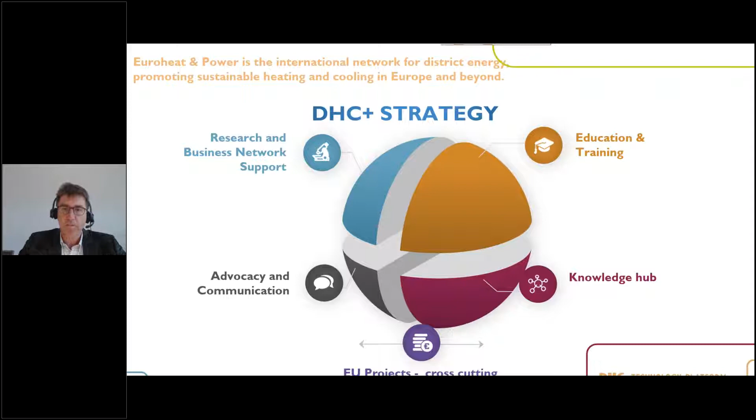Next, I want to briefly give you an overview of the process of evaluation and selection of the awarded best papers.

In total, we received 11 applications from 10 countries. These papers, around 8 to 10 pages in size, were evaluated according to scientific importance, the methodology used, creativity, and, which is important for us, the expected market impact.

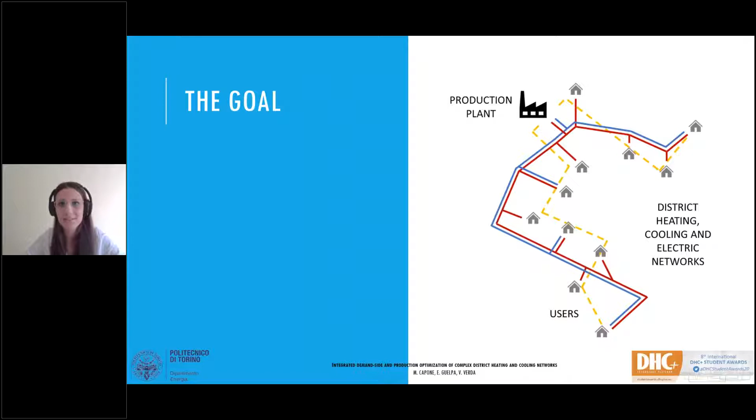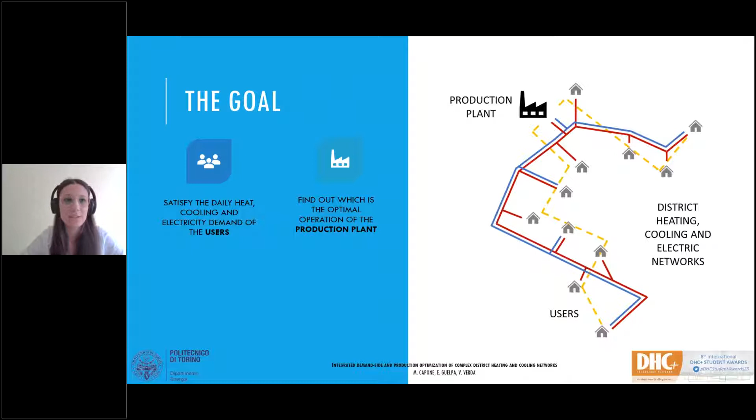So on the whole, we have 3 main interconnected players in our system: these are the users, the networks, and the production plant. And our goal would be to satisfy the daily heat, cooling, and electricity demand of the users by finding the best configuration of the system, which allows us to minimize the predefined objective function, that in our case will be the total daily cost. And this will be done by means of a global optimization tool, which takes into account all the main elements of the system.

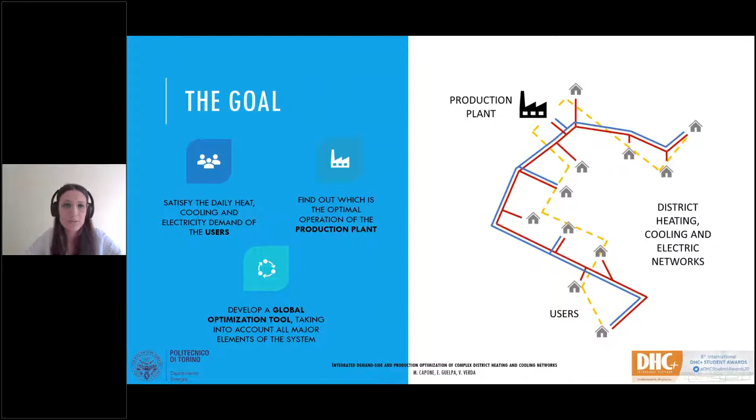For what concerns the production plant, it is made by multiple components. Here you can see that we have a heat-only boiler, a cogeneration plant, a photovoltaic system, an electric heat pump that can produce both heat and cold, an absorption refrigeration unit, and 3 storages. And the external resources that drive the whole system are natural gas and electricity purchased from the grid. These are the only resources coming from the external system, so they will be the only terms that are associated with cost and will appear in our objective function. Generally speaking, they are the fluxes that we want to minimize.

As you can see from the scheme, we have also inserted the possibility to sell electricity to the grid if our production exceeds the request. So on the whole, we want to buy the least possible from the external system to satisfy the heating load, the cooling load, and the electricity load.

But while the cooling load and the electricity load are constant, the heating load is flexible. This means that we can also act on the customer side to optimize our system. And this is what is generally called demand side management, and it's extremely useful to solve some problems, like, for example, the problem of the morning thermal peak, which poses some limits on the full exploitation of high efficiency plants like the cogenerator, and which therefore increases the cost.

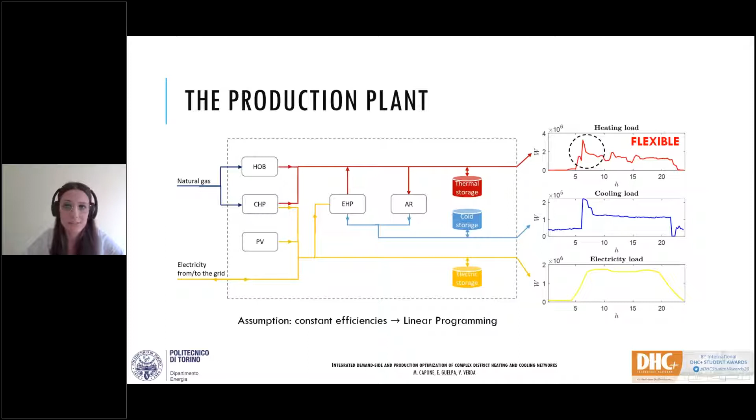But let's see more in detail how demand side management works. So basically we have our system, and what we want to do is to assume that the buildings have a certain flexibility on their thermal request, and to modify their request in order to modify the heat load at the production plant, and in particular to reduce the peak.

But in our case, we suppose that just anticipations up to 30 minutes are possible, and that the energy absorbed by each building during the day is constant, and this is to avoid affecting the user's thermal comfort. So we want to find the best anticipation of the building that allows us to minimize the peak request.

But in order to relate the building request to the heat load of the thermal plant in a proper way, we need to use a model in order to take into account all the relevant thermal dynamics that occur in the system, especially when anticipations are applied.

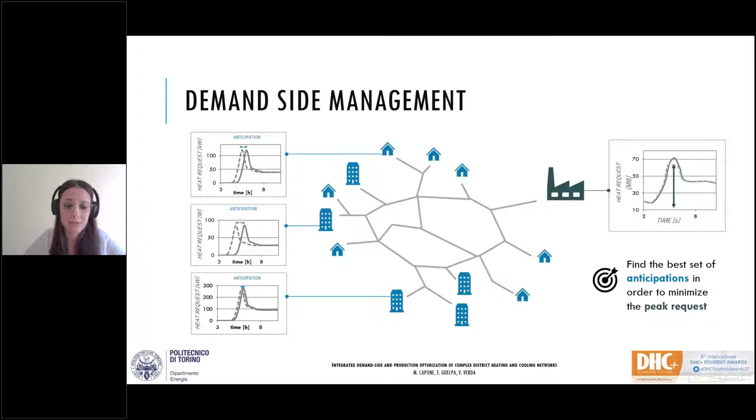And so the district heating network model that we use is a physical model. It is based on the conservation equations of mass, momentum, and energy. And it uses a pseudodynamic approach, which means that the fluid dynamic problem is treated as a steady state, while the thermal problem is simulated dynamically.

We use graph theory to describe the complex structure of the network and the network topology. This means that each pipe is treated as a branch, and each inlet or outlet section as a node. And finally, the model is applied to both the supply and return lines of the network, so that all the dynamics are properly described.

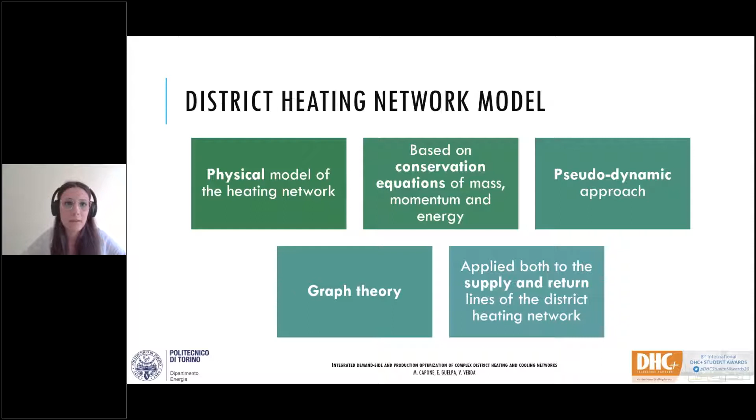So on the whole, the optimization tool that we propose is composed of three parts. The first part is the demand side management of district heating users, which aims at finding the best set of anticipations of the buildings. And this is done by means of a genetic algorithm.

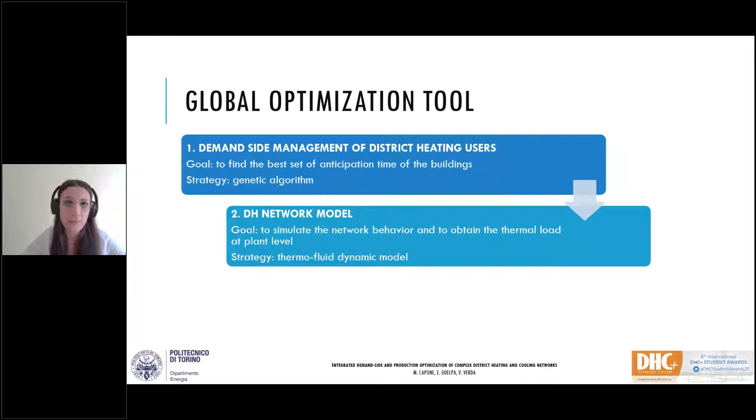This genetic algorithm needs to solve at each iteration the district heating network model in order to find, given the set of anticipation, the heat load at the production plant. This is done by means of the thermofluid dynamics model that we have described. And finally, the genetic algorithm also needs to solve the production optimization, whose goal is to determine, given the set of production units, which ones must be switched on and when, in order to minimize the total daily cost. Thanks to the assumption of constant efficiency of the components, this can be done by means of a linear programming algorithm.

This is on the whole the novelty of our approach, which combines together the demand side management of district heating users, the network model, and the production optimization in a unique, comprehensive approach that, we believe, will bring more powerful results with respect to a sequential approach in which you consider all these parts as separated.

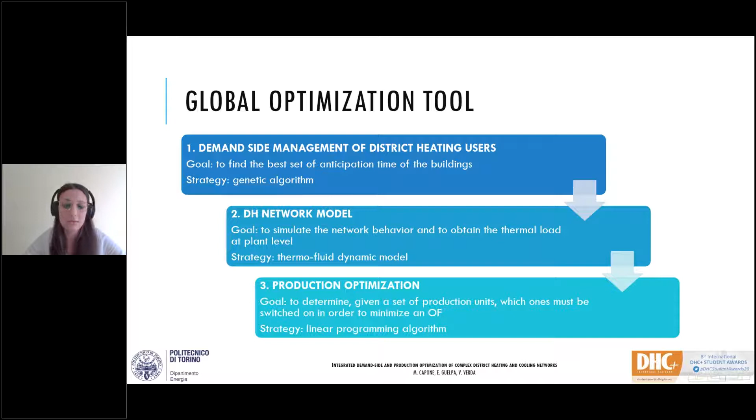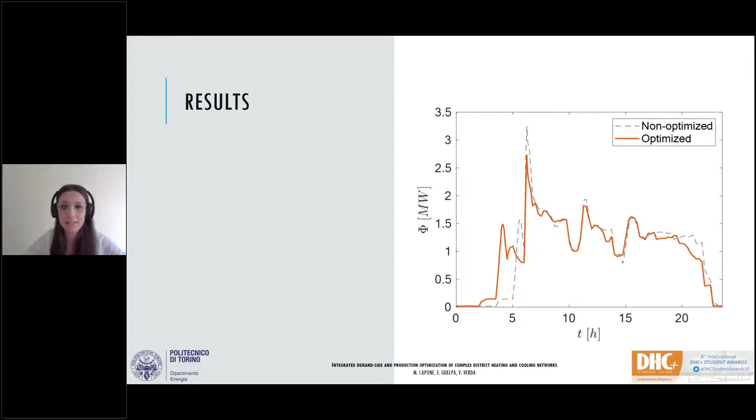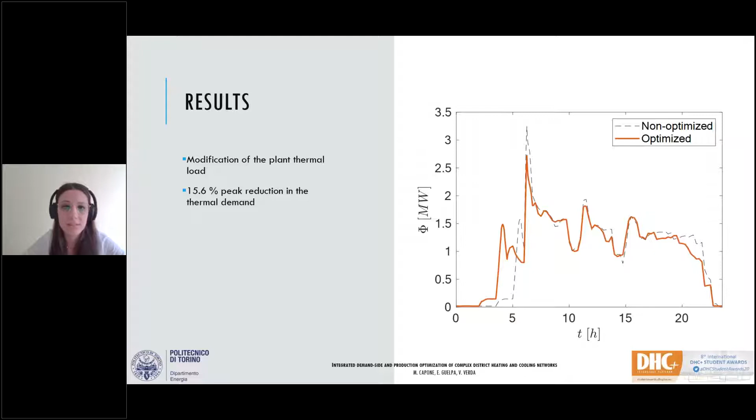But let's see the results. Here we can see the evolution of the heat load at the production plant, and in particular the dashed line is the non-optimized one, so the one without demand side management, while the red line is the optimized one, obtained with optimized set of anticipation. So we see a modification of the plant thermal load, which brings a reduction in the thermal peak that in this case is above 15%.

Here we have the result of the production optimization, and we can see in particular how heat, cold, and electricity are produced in the first row and consumed in the second row. For the heat, we can see that the heat consumption is mainly due to the thermal load, which is the one that we obtained with the demand side management, the one that we saw in the previous slide. Then some other heat is absorbed by the absorption refrigeration unit to produce cold, and finally by the storage.

Storage consumption means that the storage is charging, while storage production means that the storage is discharging. Then the heat is produced by the cogenerator and by the heat-only boiler, while the heat pump is just used a few times. The cold is almost totally produced by the absorption refrigeration unit, even if the storage is used to shift the production when it is more convenient, that means when heat consumption is more convenient.

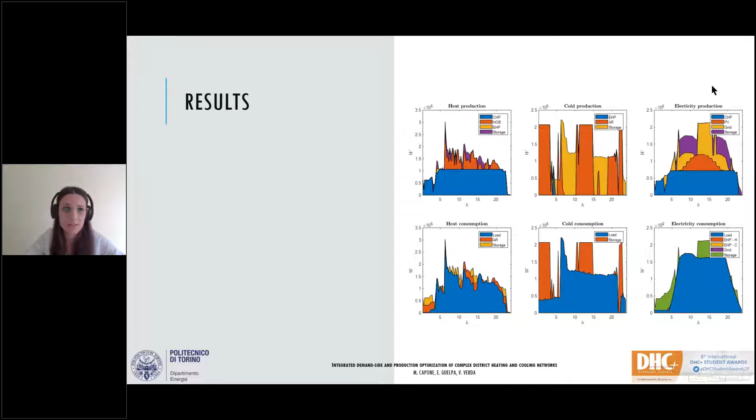And finally, the electricity is produced by the cogenerator and the photovoltaic when available, while the remaining part is purchased from the grid, and the storage is used to buy from the grid when it is more convenient, so where the electricity price is lower. So we see a smart management of the production unit, which brings a significant cost reduction.

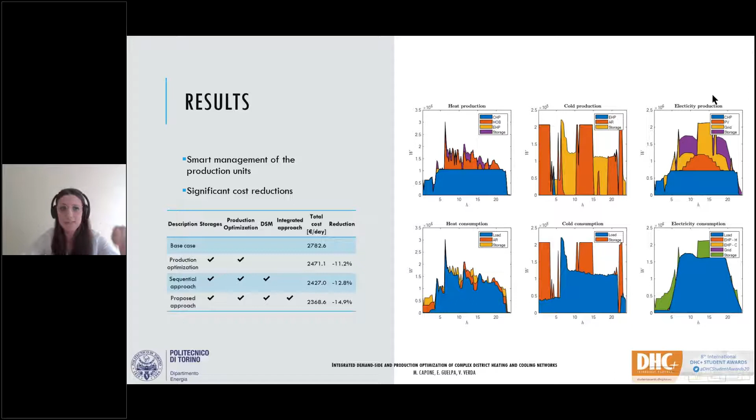These reductions are summarized in this table, and we have a 15% reduction with respect to the base case, which is the one without storage, without production optimization, and without demand-side management. But meaningful results are also obtained with respect to the sole production optimization and the sequential approach, which is the one in which you first reduce the peak and then in a second moment optimize the production.

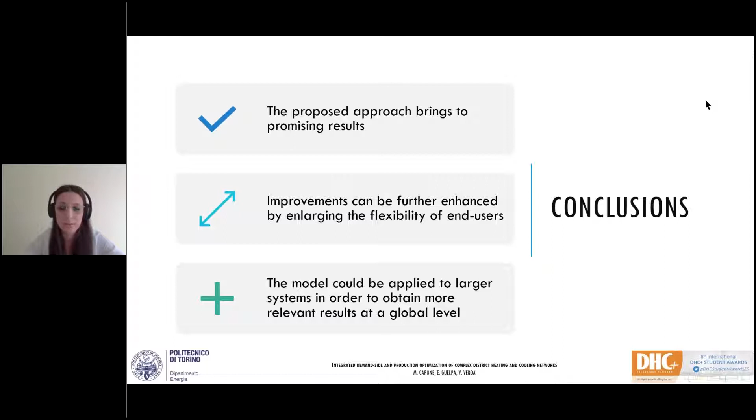In conclusion, we have obtained a tool which brings promising results. These results can be further enhanced by enlarging the flexibility of the end users, that is to say, for example, if anticipations greater than 30 minutes are possible, and they can be further enhanced if larger systems are considered. This work also opened up several research opportunities for future work.

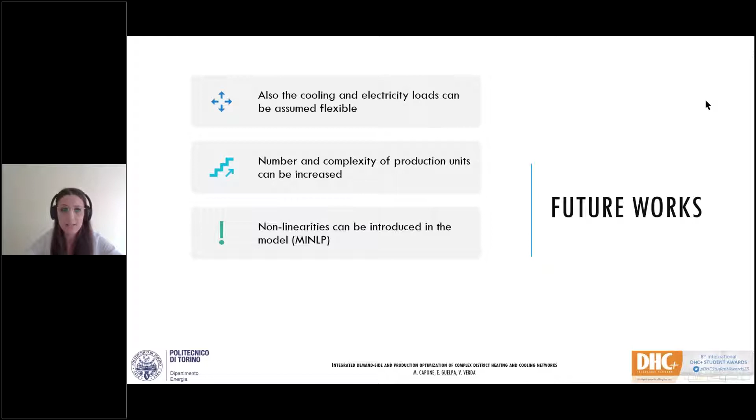First of all, the cooling and electricity loads can also be assumed flexible, but this will require including also the models for the cooling network and the electricity network in the optimization tool. Also, another point is to increase the number and complexity of production units. Then we also need to study the effect of the introduction of nonlinearities in the model, like the nonlinearities that are due to, for example, nonlinear efficiencies of the plant.

And finally, in our work, we have considered all the production units concentrated in a unique point, when in real cases they can be distributed everywhere along the network. So also this point should be taken into account.

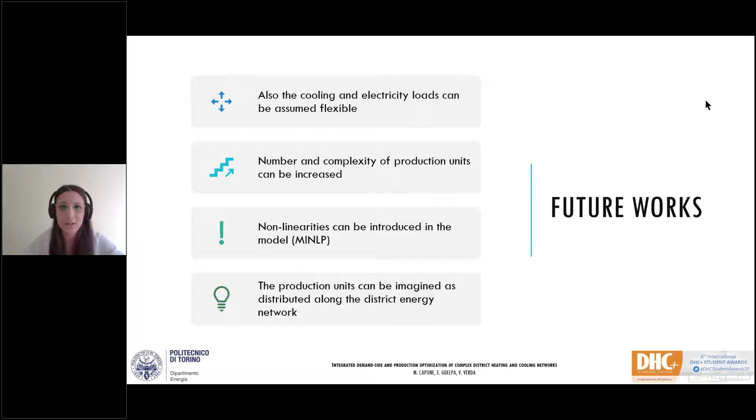Well, that's it. Thank you for listening. And in a while, I will be happy to answer your questions.

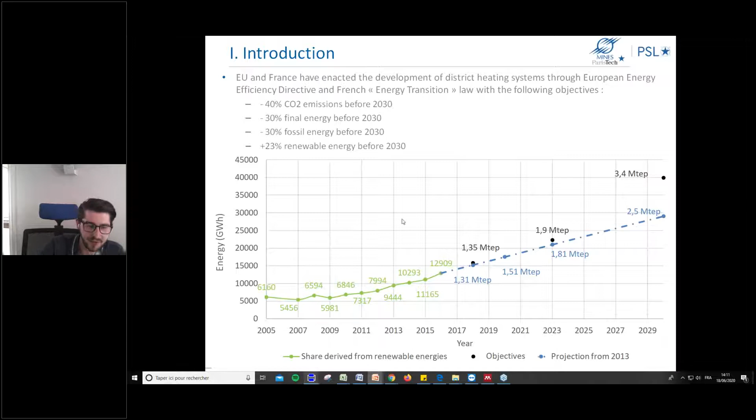Here in the graph, you can see the current situation in France. In green is the energy share derived from renewable energy in district heating systems. In black, the objectives from the law, and in blue, the projection from 2013. You can see that the target will not be reached in 2030. So there is a need to develop the district heating system in France and also to improve the existing one.

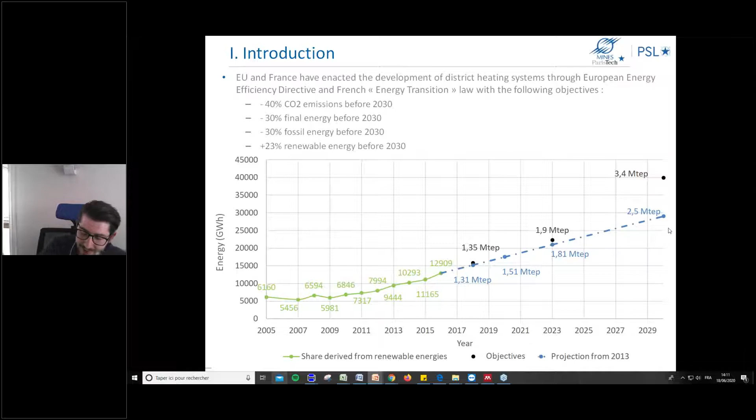And we focus on the second point. So I wondered how to improve district heating network performance. The answer is quite simple: by decreasing the return temperature. But it's easy to say, not so easy to do.

For example, we can decrease the return temperature by correcting malfunctions. Indeed, malfunctions on district heating systems are very common. For example, according to a study on 2 Swedish district heating networks, only 26% of the substations work correctly. So there is a need to work on these malfunctions.

Moreover, due to the complexity of the system, the origins of malfunction are numerous, but the most usual ones have been detected: damaged or manually adjusted valves, poor substation control, and unsuitable secondary systems.

So in the literature, some performance indicators have been developed. We could mention Zinko in 2005 and Gadd/Werner in 2014. These indicators are able to detect if there is a malfunction, but they are not able to detect the origin of the malfunction. And in the real world, operators don't have the time to look for the origin of a malfunction, nor do they have the tools to detect and correct malfunctions.

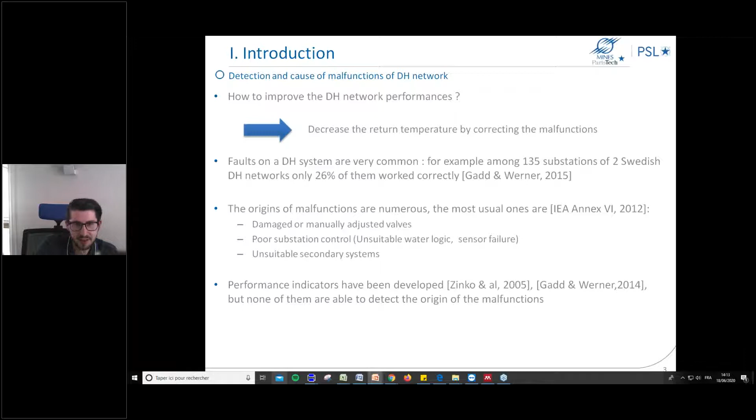So my work focuses on this point. My objective was firstly to develop a district heating model including the secondary side, because there is a lot of interaction between the primary side and secondary side, and many malfunctions occur on the secondary side as well. Secondly, it was to assess the impact of usual malfunctions to create performance indicators able to distinguish each of them.

So the methodology is the following: firstly, we study the impact of malfunction on our numerical test bench. After that, we create performance indicators, then we test them on the numerical test bench, and at the end, we validate the indicators on in-situ data.

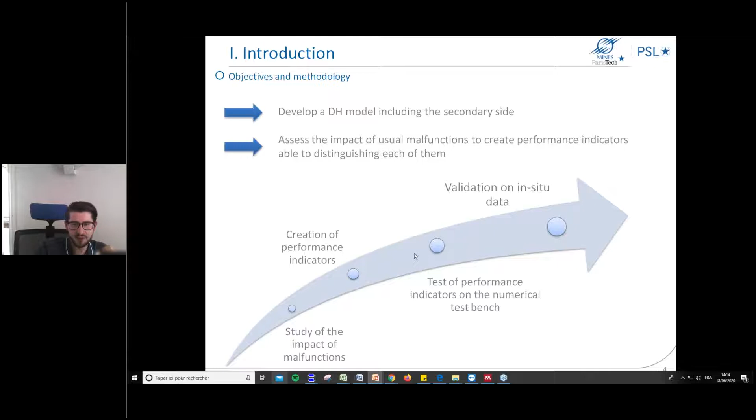Today I will only present 2 specific objectives: the detection of blocked valves and the detection of fouled heat exchangers. When I talk about valves, I mean the control valves on the primary side of the substation. These valves control the flow rates passing through the heat exchanger.

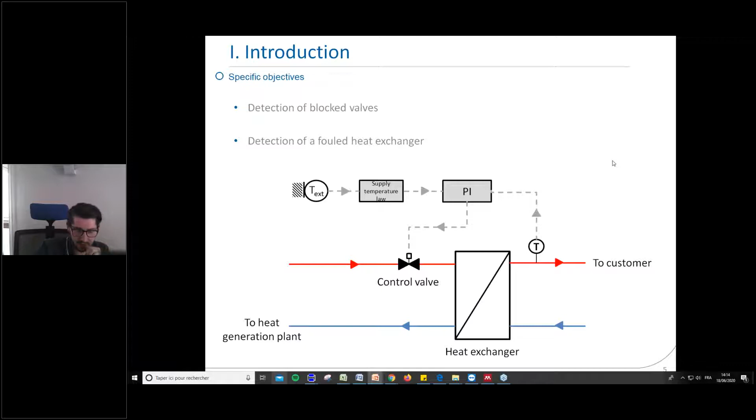So first I will give a brief description of my model. This model has been developed through Modelica Dymola, so it's a physical model. Firstly, you have the production model, composed of a geothermal heat exchanger and a gas boiler, controlled through a supply temperature law. After that, you have the primary network and the pump, and the pump is controlled through a pressure law.

And after that, you have a model of a substation and its control system, the secondary network and its control system also, and a buildings model.

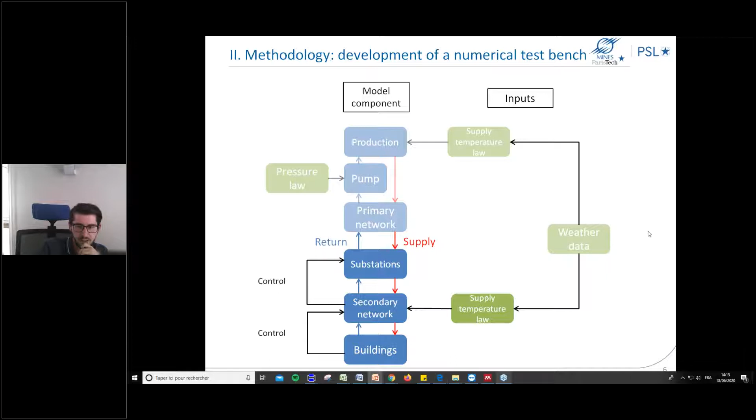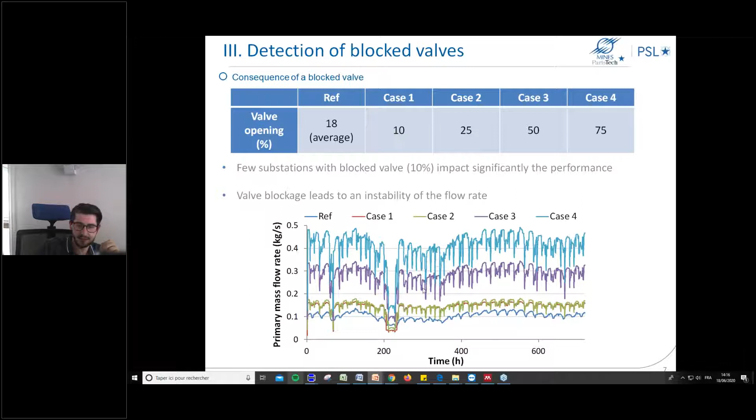And in all the cases where there is a blocked valve, you can see a lot of instability. So in order to quantify the instability, we decided to do it through the relative mass flow rate variation. We compare the mass flow rate at 2 consecutive time steps, with a time step of about 1 hour. And to evaluate the frequencies of this variation and the difference between all the cases, we decided to do a frequency signal analysis, or Fourier analysis.

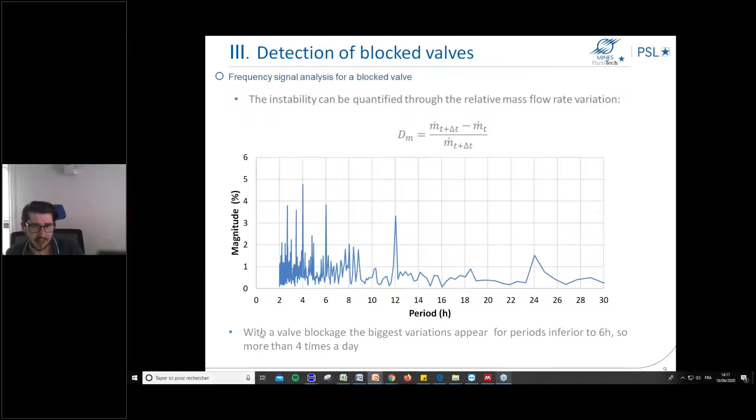And after, we do the same analysis on a substation with a blocked valve. As you can see here on the Fourier analysis, the magnitude of the peaks is higher, and the biggest variation appears for periods inferior to 6 hours, so more than 4 times a day.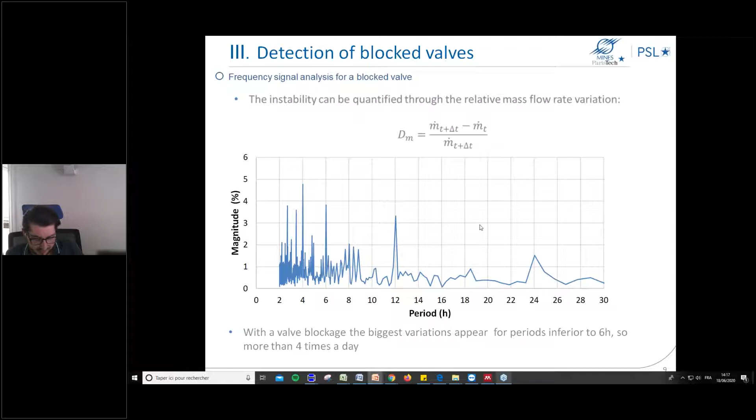Nevertheless, this analysis is overly complex to be used in the field by the operators. So we decided to develop an indicator easy to calculate. This indicator consists in counting the number of times per day when the relative mass flow rate variation is superior to 15%. If the relative mass flow rate variation is superior to 15% more than 4 times a day, there is a regulation issue, so a blocked valve.

Here you can see the results from the numerical test. For the reference case in blue, the threshold is never exceeded, but it does frequently for case number 3, which corresponds to a valve blocked at 50% opening. You can see the times where the threshold is exceeded marked here. The time scale here is about 2 days, and you can see that the threshold is exceeded more than 4 times a day, so there is a regulation issue.

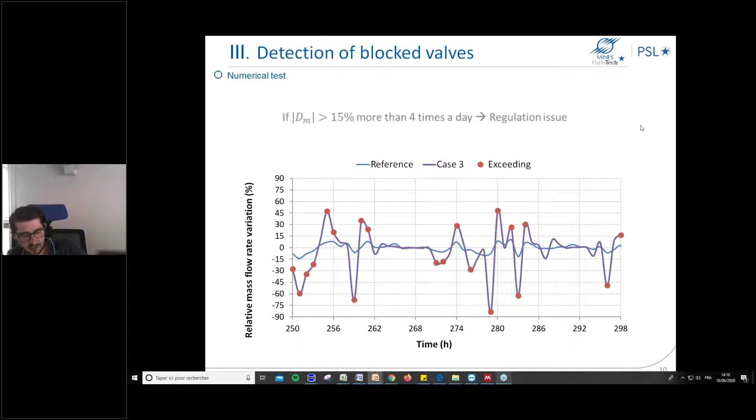So in order to validate this indicator, we tested it on in-situ data. Here, the result demonstrates that there is no control issue for substation X. The time scale here is about 1 week. You can see in red the times where the threshold is exceeded, and you can see that there is practically no exceeding.

But for substation Y, you can see that the threshold is exceeded more than 4 times a day, a lot of the time. So we can consider that in this substation there is a regulation issue, and this analysis was validated by the operator of the district heating system. So the indicator is working.

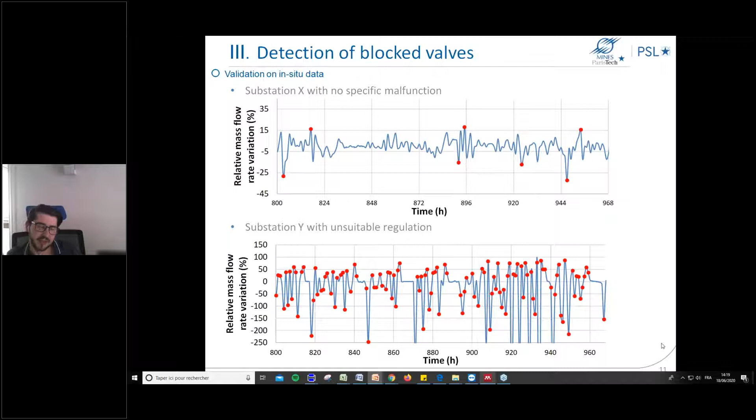Next, the second point was the detection of fouled heat exchangers. With no surprise, the fouling impacts the performance of the district heating system, but the fouled heat exchanger also leads to an increase of the heat exchanger's thermal resistance. In classical substations in France and in Europe, the heat exchangers used are plate heat exchangers in counterflow.

For this type of heat exchanger, the thermal resistance without fouling depends only on mass flow rates, as you can see in this equation. The thermal resistance also depends on a constant named gamma here, which depends only on the dimensions of the heat exchanger and the characteristics of the fluid. During operation of the district heating system, the total thermal resistance of the heat exchanger is the thermal resistance without fouling plus a fouling resistance called RF here.

After an analysis of our data and simulation, we consider that the fouling downgrades significantly the return temperature, about 5 degrees, when the ratio between the total resistance and the resistance without fouling is above 1.4.

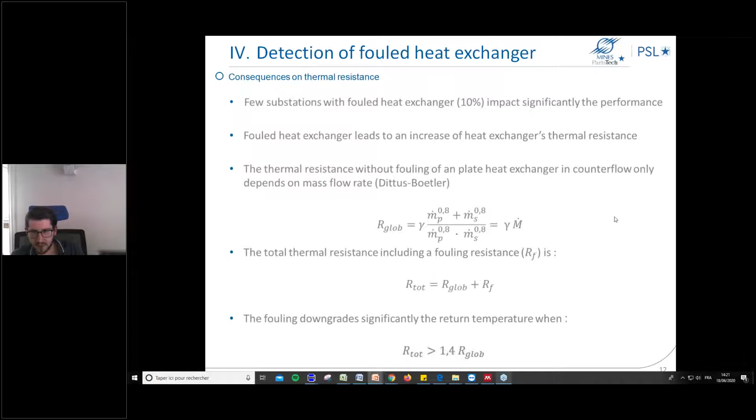So we get this type of indicator. We plot the thermal resistance corrected from a mass flow rate ratio, corresponding to the last equation. As expected, for the reference case, so without fouling, the evolution of thermal resistance corrected from mass flow rates is linear, so it's good news.

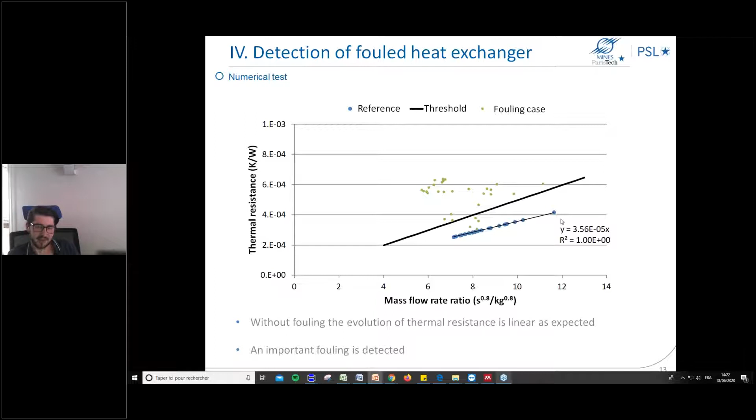Here, we plot the calculated results, and the green points show the case where there is fouling, a very dynamic and fast fouling, and you can see here that the threshold is exceeded, so an important fouling is detected. The numerical tests show that the indicator works, but as before, we decided to test it on in-situ data.

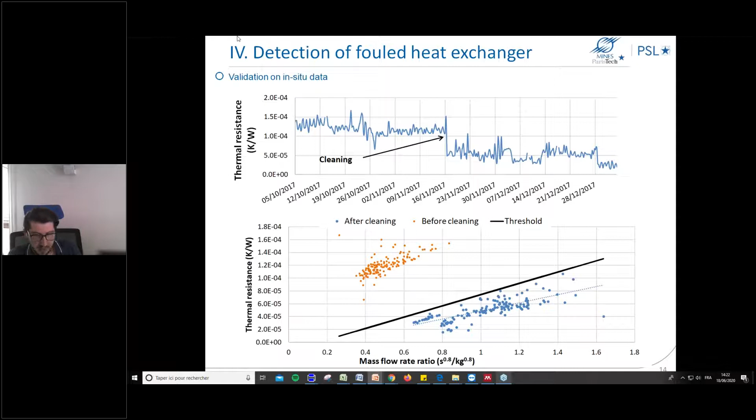So we looked at a substation, another substation. Here you can see the evolution of thermal resistance in time. Around the 15th of November, the heat exchanger was cleaned during maintenance operation, and you can see a meaningful drop of the thermal resistance.

So here, to test the indicator, in blue you have the evolution of thermal resistance after the cleaning. You can see we are under the threshold, but before the cleaning, when the fouling was very high, the points are beyond this threshold. So this indicator was able to detect an important fouling here.

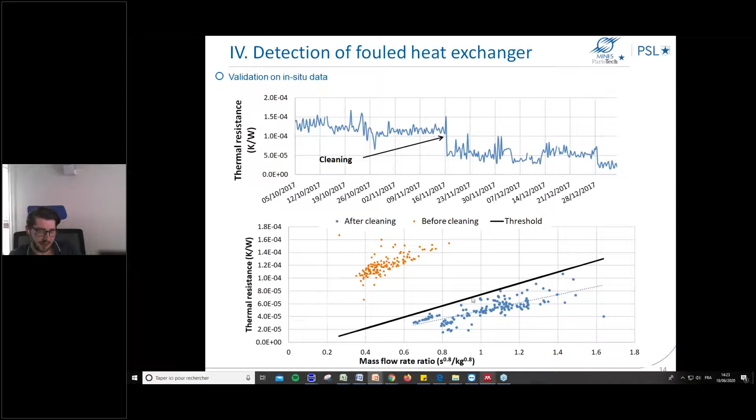To conclude, in my study I have developed a district heating system model, including the operation of the secondary side, all the control, etc. Two possible malfunctions have been tested: blocked valve and fouled heat exchanger. Two specific indicators have been developed and validated: the instability of mass flow rates at the primary side, and also the increase of thermal resistance corrected from mass flow rates.

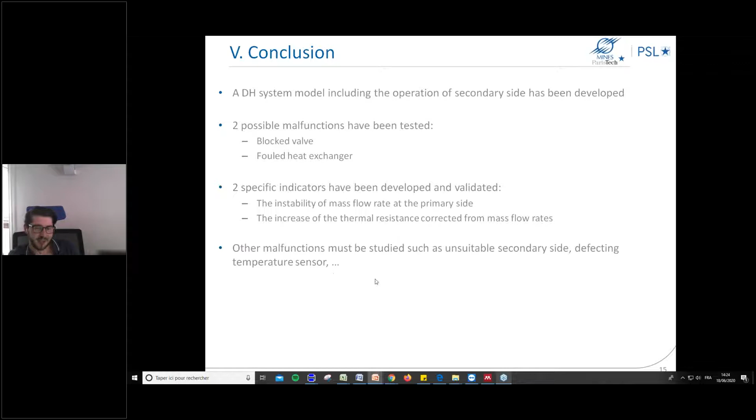In the following works, I will study other malfunctions, such as unsuitable secondary side control or defective temperature sensors, etc. There are a lot of different malfunctions possible, so there is a lot of work to do. Thank you for your attention. I'm waiting for your questions after all the presentations.

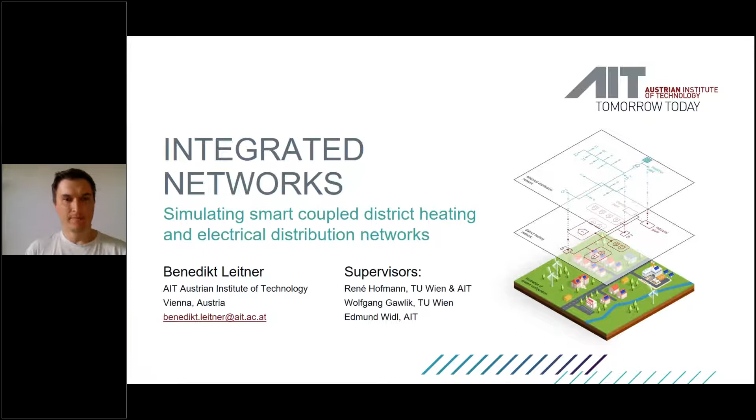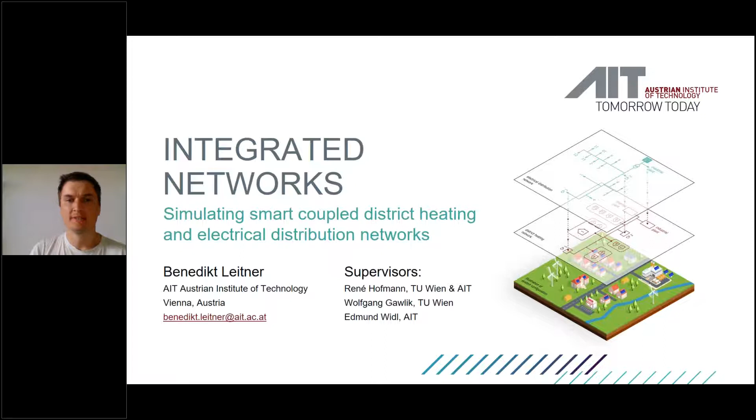I will talk about integrated or sector-coupled networks with a focus on district energy and electrical distribution networks. The motivation is that both heat and power networks are rapidly transforming from centralized, often fossil fuel-based generation to distributed generation storages, integration of prosumers, widespread use of intelligent control, low energy buildings, and increased integration between the sectors. This complexity of multi-domain systems often requires detailed assessment of how these multi-energy use cases affect the system, and we also need means to test smart control algorithms before they roll out in the field.

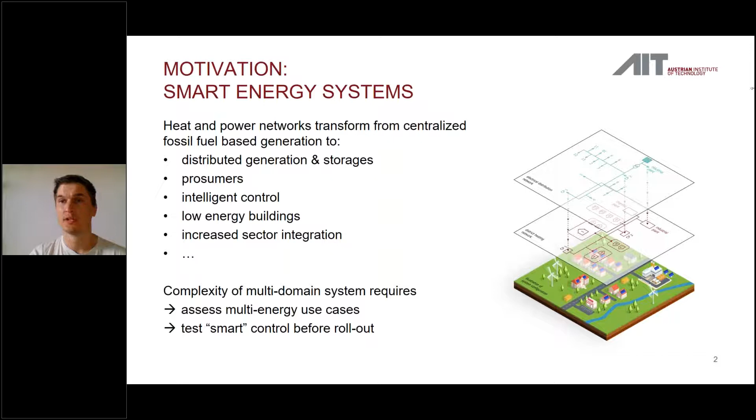When I started my PhD, no real method to assess electric distribution networks and district heating networks together with advanced control systems existed for timescales of several seconds to hours, days, or even years. So this was basically the motivation for me to try to develop some method that allows me to study such coupled systems.

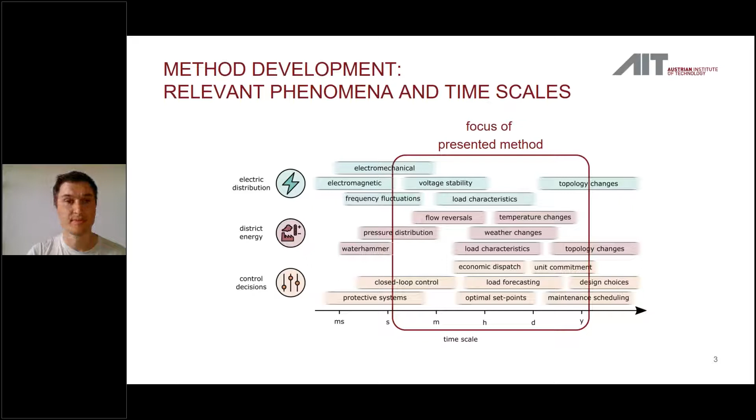I quickly realized that no single tool covers all necessary domains, which are thermal hydraulic models, models for the electric network, but also models for advanced control, like model predictive control, for example. You can now use co-simulation, which is a really nice solution to this problem because it allows you to cherry pick tools that are specifically targeting each of these domains, and couple those tools and models.

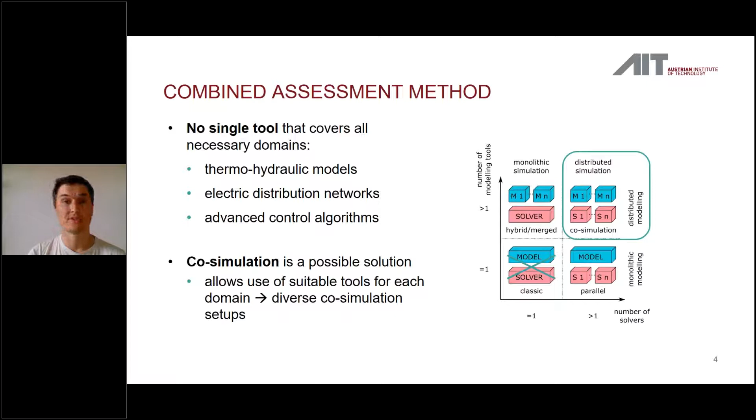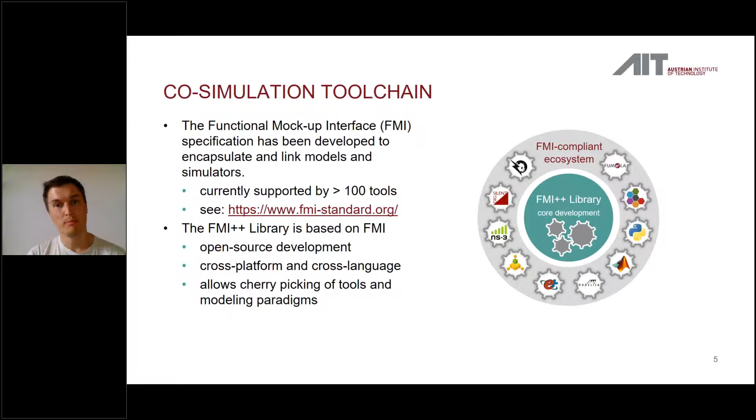For my work, I rely on the functional mockup interface specification, which is basically a standard to link models and simulators. At the moment, more than 100 tools are already supported for the FMI standard. And at AIT, we also developed interfaces for additional tools like Python, PowerFactory, pandapower, etc.

So when I started with developing the method, I wanted to have a model for the physical system, basically representing the electric distribution network and also the district heating network explicitly, and couple those physical system models with different control system models that might be rule-based, optimal control, supervisory, central or distributed controllers, or any mix between those.

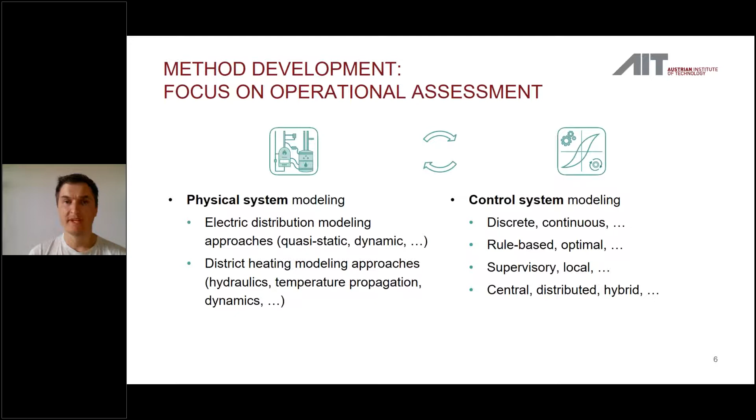The method I came up with uses a dynamic model for the district heating network using Modelica. I developed an open source Modelica library for district heating networks, based on the open source IBPSA library. This model relies on transient thermal models and a quasi-static hydraulic approach for the hydraulic problem.

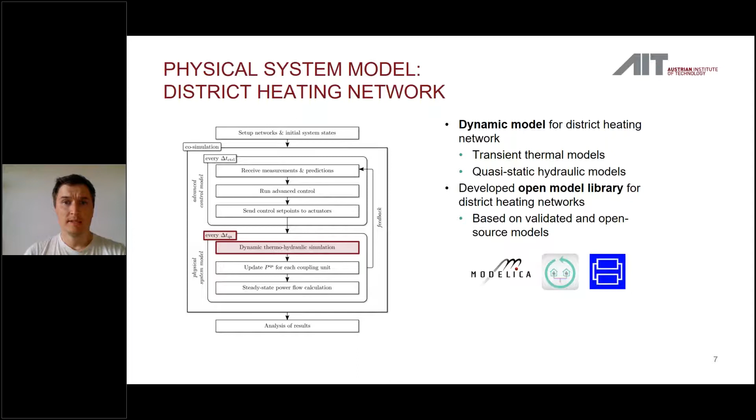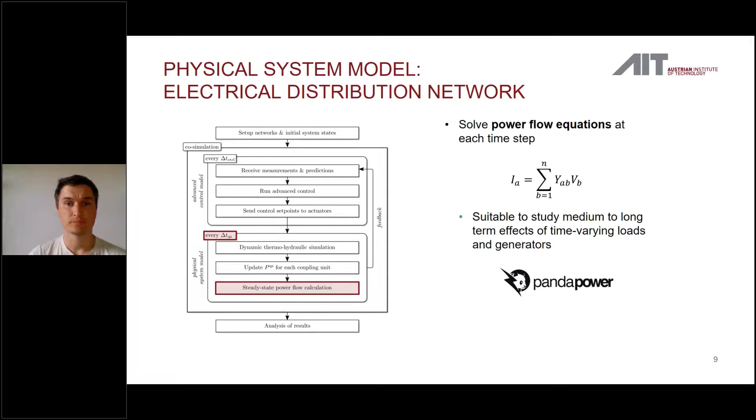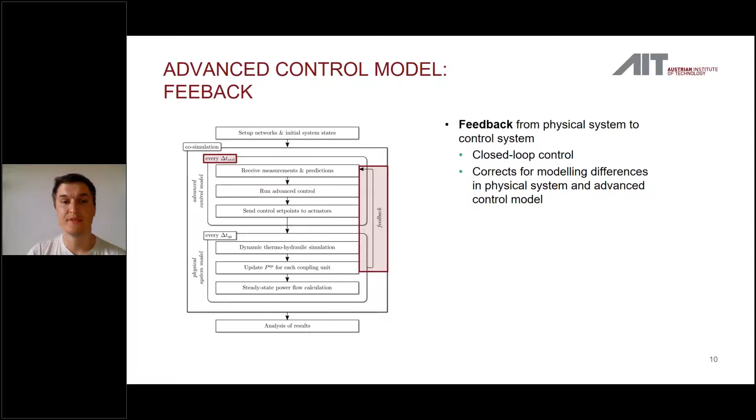I then use feedback from this physical system, from both the district heating network and the electric network, like measurements of temperatures in a tank or any other state of the physical system, and send it to the advanced control model, which uses this feedback to derive new, maybe optimal set points if you use model predictive control, and send these set points to the physical system model at each control time step. This is repeated at each control time step.

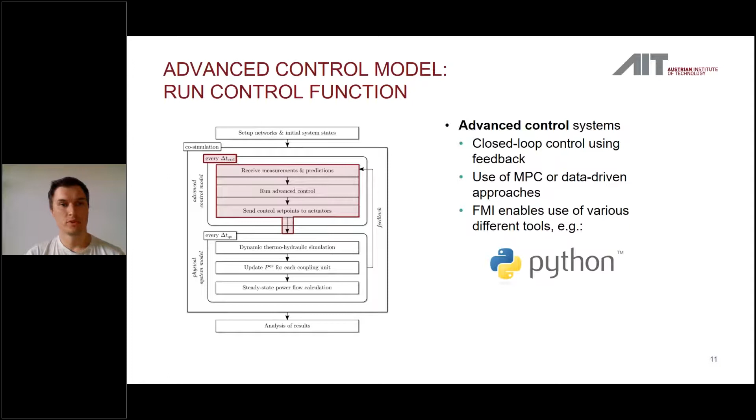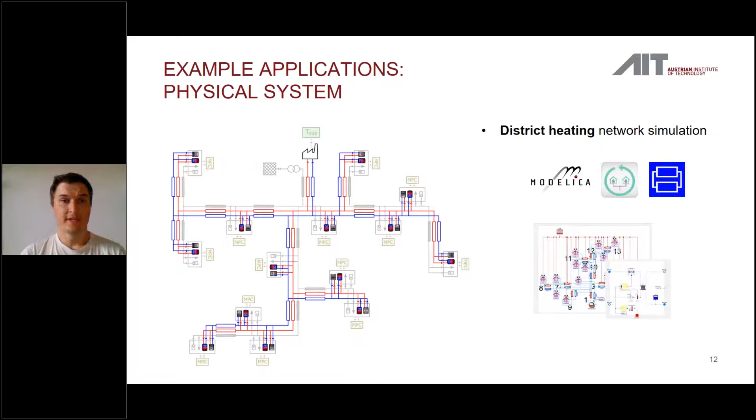But let's have a look at an example. We have here a network with 14 buildings. This is the district heating network. You see a screenshot of the Modelica model on the lower right. And we have here the electric network with transformers, lines, PV generation, and electric load for each building.

The building demand is here represented by time series. We have a detailed secondary side of the district heating network. For example, we have heat exchangers, valves, we have tanks, and for this example we use electric booster heaters to prepare domestic hot water.

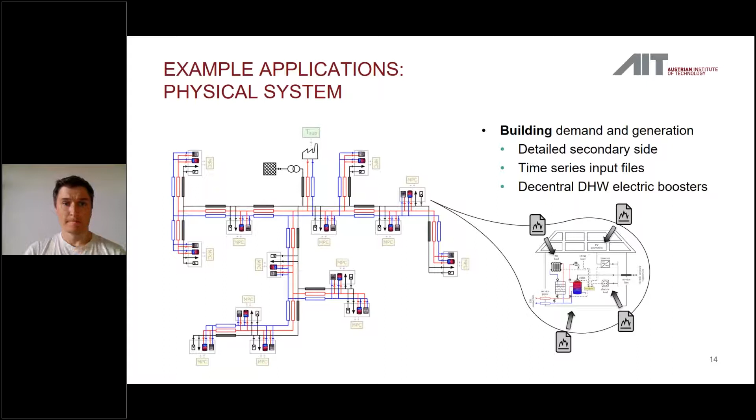So the first use case for the method is to control the supply temperature of the main district heating supply unit. We basically lower the supply temperature at this main supply unit and use the decentralized electric booster heaters to guarantee domestic hot water supply, so both comfort and to avoid Legionella.

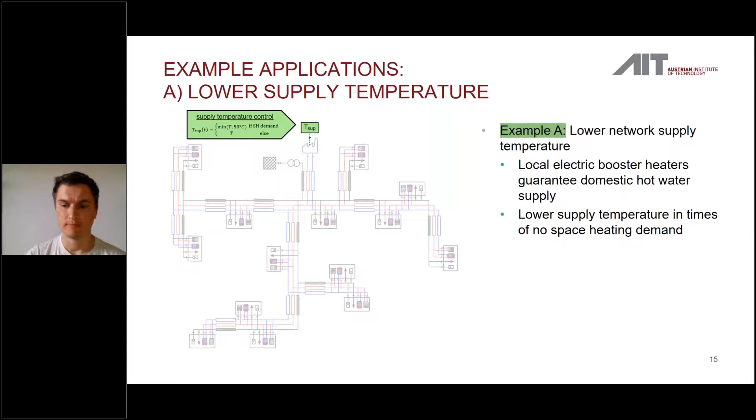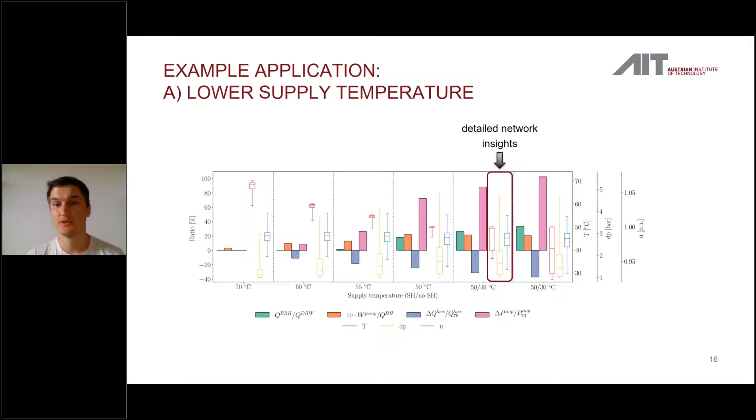We see that this method basically allows us to assess very detailed network insights when it comes to supply temperature at the consumers, or differential pressure levels at each consumer, but also voltages at each consumer. On a higher level, we can assess different performance indicators. We see that pump energy increases when lowering the supply temperature, district heating losses decrease, and power imports increase, for example.

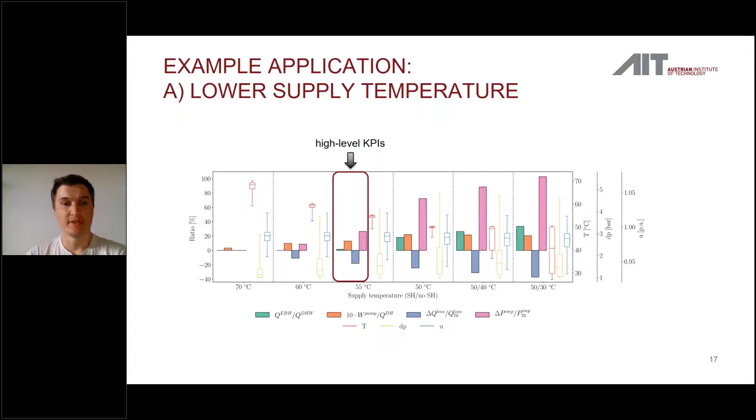Another, maybe smarter application for the method is to control these decentralized electric booster heaters with model predictive control. So now each of these electric booster heaters has model predictive control that controls the electric heating rod. The goal of the MPC is to avoid simultaneous use of domestic hot water and space heating, to lower the peak generation of heat of the main district heating supply unit.

On the other hand, we can use the electric heating rod as a flexibility option for the electric network to, for example, increase the self-consumption of PV generation.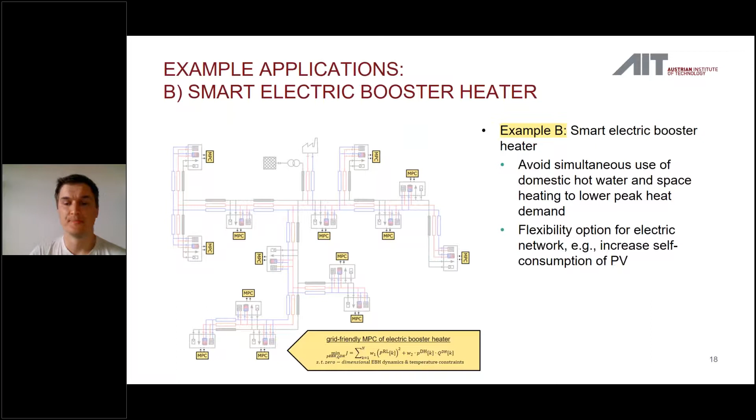And we can now compare the model predictive control algorithm with other controllers, like a simple control that only uses PID controllers. We can also assess the impact of different forecasting methods, like using perfect forecasts or simple naive forecasts, where we use the demand of the last 24 hours, for example.

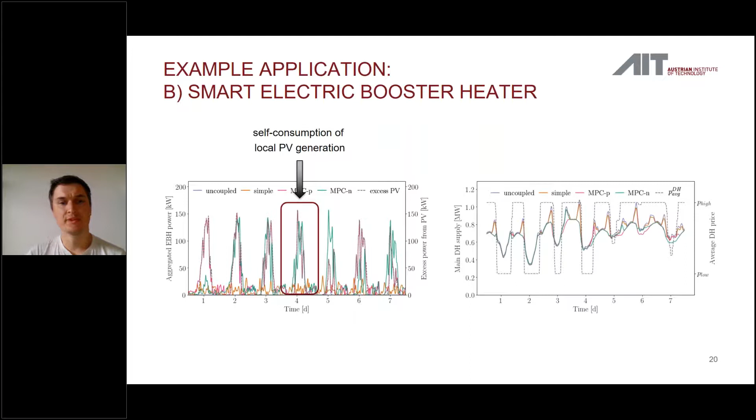And we see that PV self-consumption is increased by using the MPC. We can also see that the heat demand of the district heating network is decreased.

So in summary, to conclude my work, this method can be used very versatilely. You can do control assessments. We can also validate different designs, like using a larger storage tank. The method can also be at the core of a digital twinning use case. We can do what-if analysis, so what if we replace the electric heating rod with a heat pump, for example? And even better, we can use the method to understand and also play around with these complex systems to have better insights into how these coupled and multi-energy networks work.

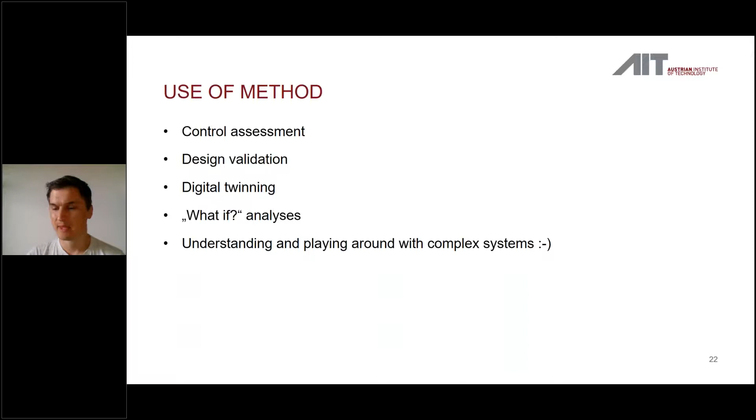I also want to point at the resources that I used for and developed for this work. Most of the resources and models are, so all of the models are open source. The only resource that is proprietary is Dymola, which, unfortunately, is quite expensive, but that's the only downside.